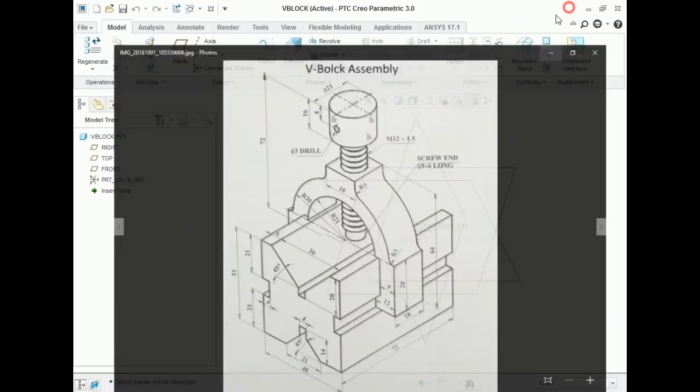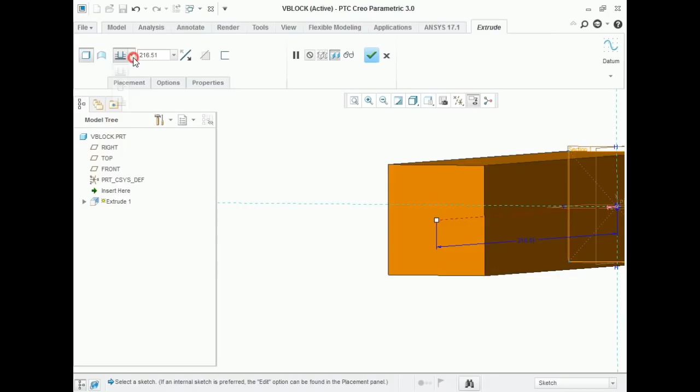Now first draw the rectangle of 51 by 48 and depth is 72. So go to the extrude, select the appropriate plane, go to the sketch view, draw the center rectangle. So this distance is 51 and this is 48. Click on OK and extrude on both sides, and distance is 72.

So it is better to draw one feature at a time. So now create this particular slot. It is having the distance of 21 by 21 from both sides and depth is 4. So go to the extrude, select this particular surface, go to the sketch view, take the reference of this edge and close it. Now draw a corner rectangle

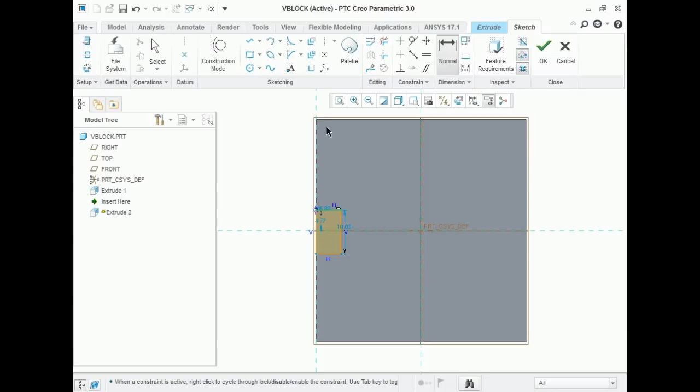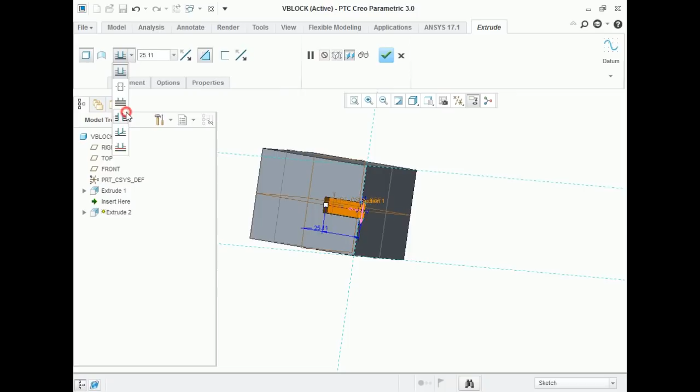to this shape. We know the distance from this end, that is 21. Distance from this end, it is again 21, and the depth is 4. So click on OK, flip it, then remove material through all, then click on OK, and same thing, mirror it on the right side, click on OK. So this shape is created.

Now we want to generate this particular slot having the width of 36. Total this distance is 45. This is 20. So go to the extrude, select the front plane, go to the sketch view, take the reference of this and close it. Now check it, this distance is 6 and then add 45.

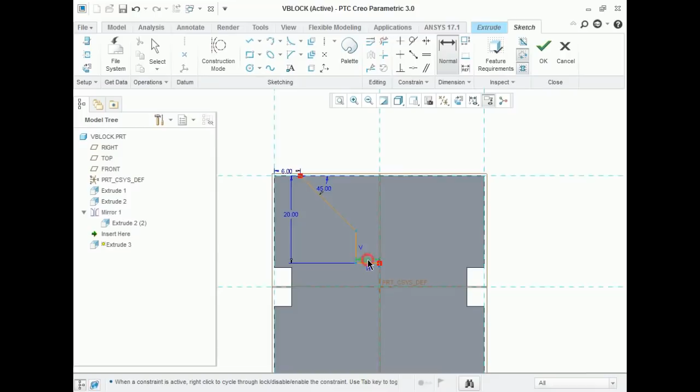So let's draw this line and this shape. We know this particular distance is 45, this distance is 6, and this to this is 20. This is 20. What else we know? We know that this distance is 4, so make it 2. So that is enough.

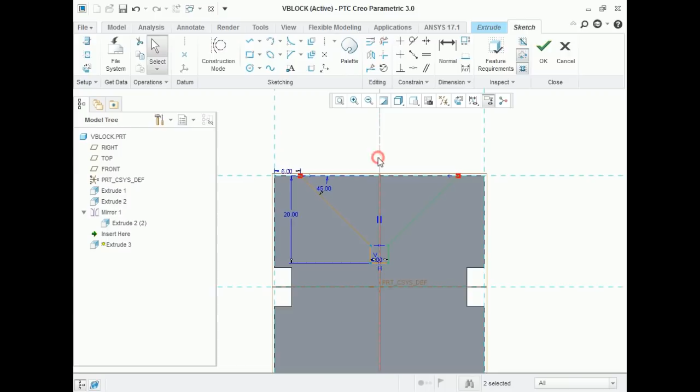Now we want to make the mirror of all those things. So draw first center line and then mirror it. Mirror, select the center line and then close the object, then click on OK, flip the direction, remove material through all, done. And similar type of slot we have to create on bottom side but with different direction.

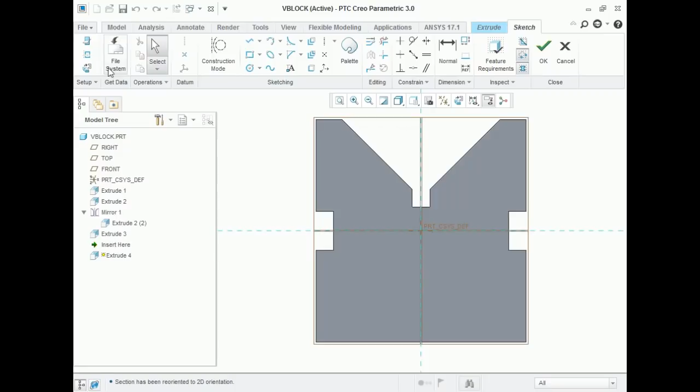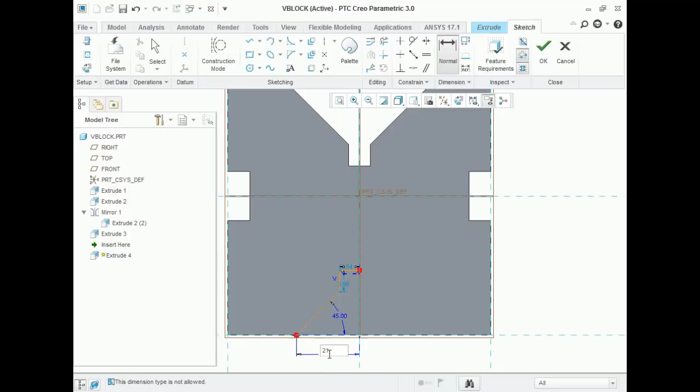So again take whichever reference you want and close it. Then here we again require this distance is 21. So again we will draw such shape. Again we know that this angle is 45. Then we know this distance, this is 21 by 2, then this is to be 2, and again we know this distance is 14. Okay, so this slot is completed.

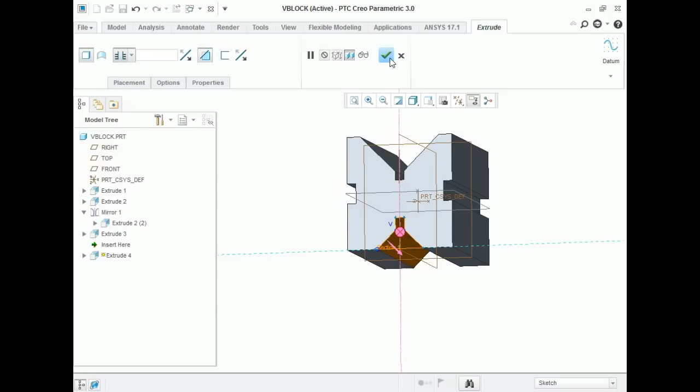So we can again draw a center line, select this particular surface and mirror it with respect to center line and close the shape. So this shape is generated. Click on OK, flip it, remove material has been automatically selected, and through all, then click on OK. So this V-block has been completed. So save it, and next thing we have to draw this C-clamp.

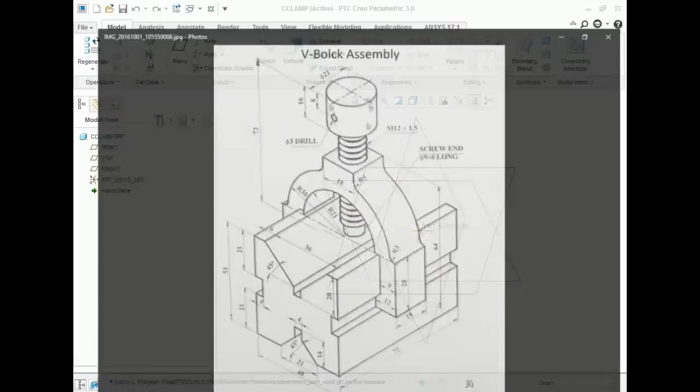So save it and close it, go to new, use default template, uncheck, C-clamp, click on OK, MMNS part solid, OK. Now we have to draw this particular cross section. So go to the extrude, select the appropriate surface, go to the sketch view. Now here we have to draw this circle and this circle. This is R21, R30.

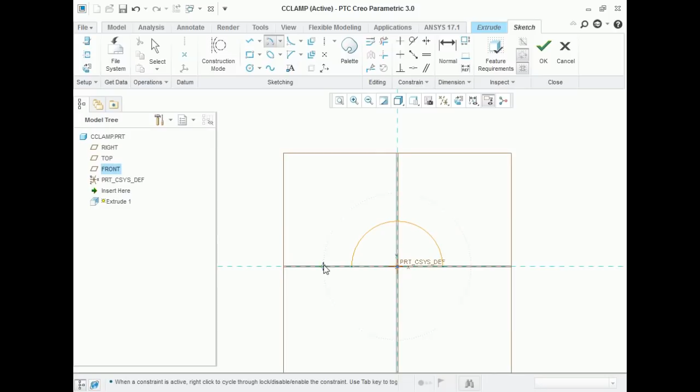So let's draw the center and ends. It is having R21 and R30. Okay, then we have to draw the next thing. So let's draw this particular rectangle. So first draw this shape, whatever is present at the bottom side. So create one horizontal line from here

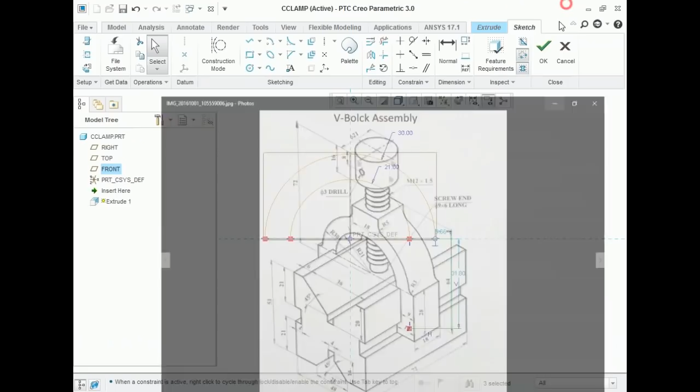and this shape. Okay, and then this distance is 12, but we already know that this is 48 minus 4. So 48 divided by 2, so from center it is 24. So up to this side it is 24, 24 minus 4, that is 20, 20 plus 12, that is 32. So this distance is

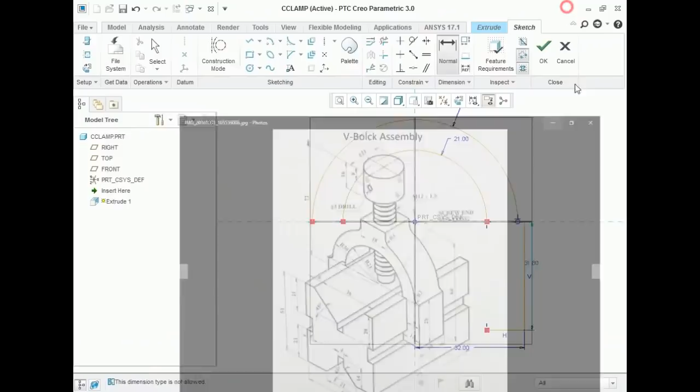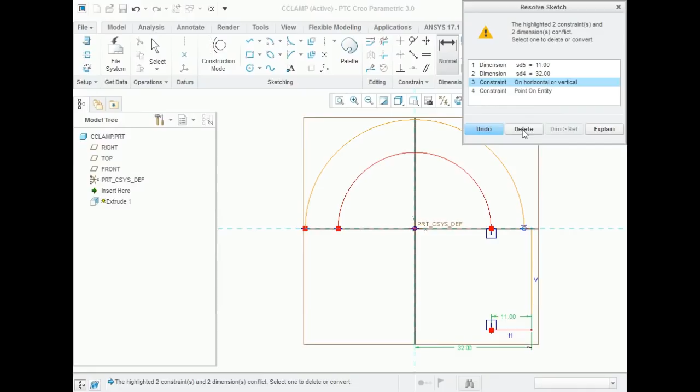go to the normal, this distance is 32, then height is 28, then this is 12. So there are both things, so we don't want this particular thing, so delete it. So this is 12, then height, this thing is 51 minus 21 minus 21.

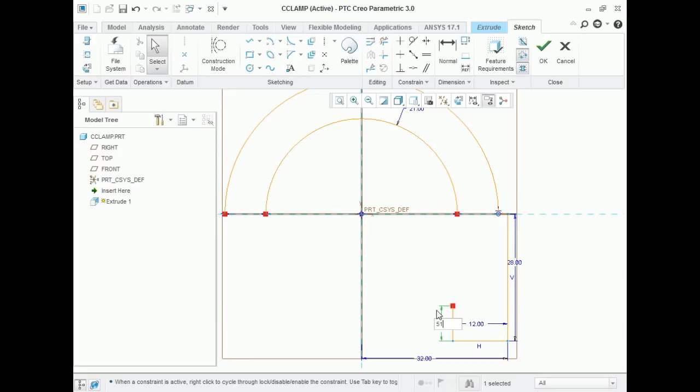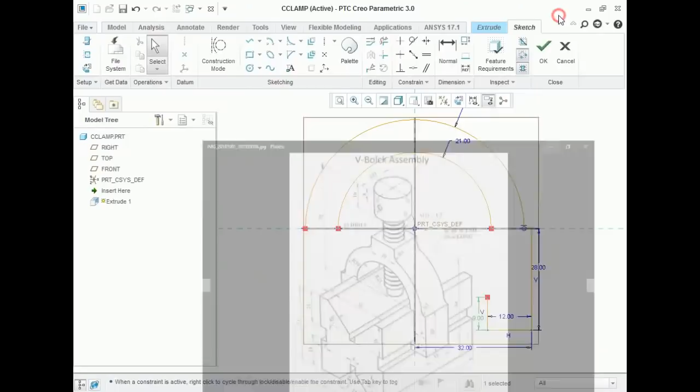So again one small vertical line, and this is 51 minus 21 minus 21, so this comes out to be 9. After that, this particular slot having the depth of 4, or this is 9, this is 12, so it will be 3. So this is 3, and the vertical line from this position. So draw a vertical line and close it.

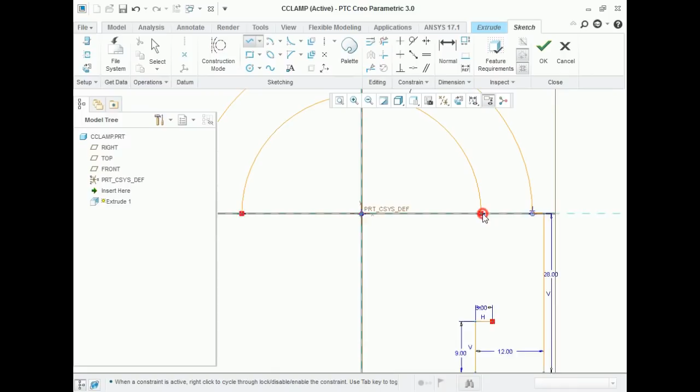Now we want to mirror it on this side, so draw a center line, select the thing which we want to be mirrored by pressing the Control, go to mirror, select center line. So this thing has been mirrored.

So in this particular condition we have calculated it as 24 minus 4, that is 20, 20 plus 12, that is 32. But as we can see, there is some gap present, as this is 9 and 12, so this distance is only 3. So we will add 1 in this particular thing. So go to Creo Parametric, we will make it 33. It is not given anywhere, so keep it 33.

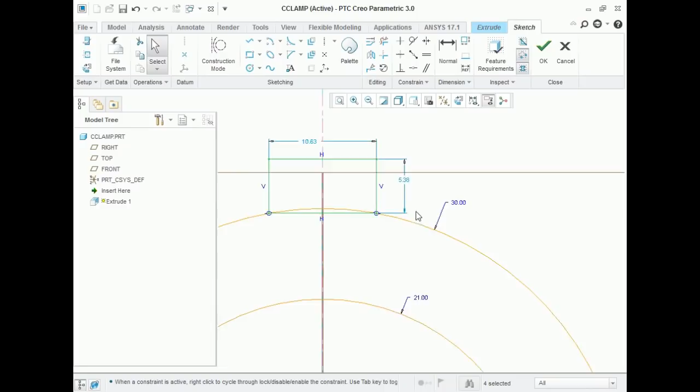Now we have to draw a small rectangle over here, and we know the total distance is 64. So go to the normal, this distance to this distance is 64, and this is 18.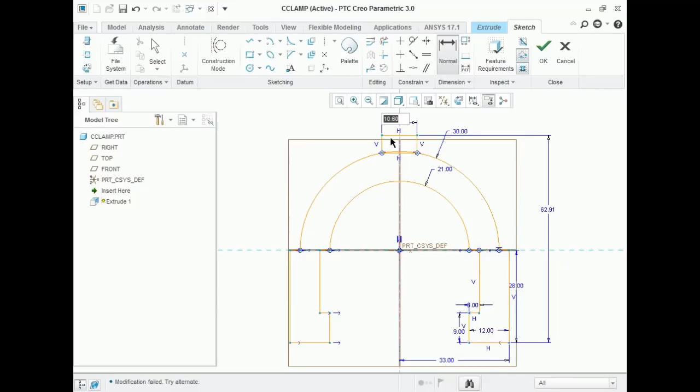Okay, now delete the unwanted line. Okay, so this shape is completed, so click on OK, then extrude on both sides, and the width is 18. So place it as 18, then click on OK.

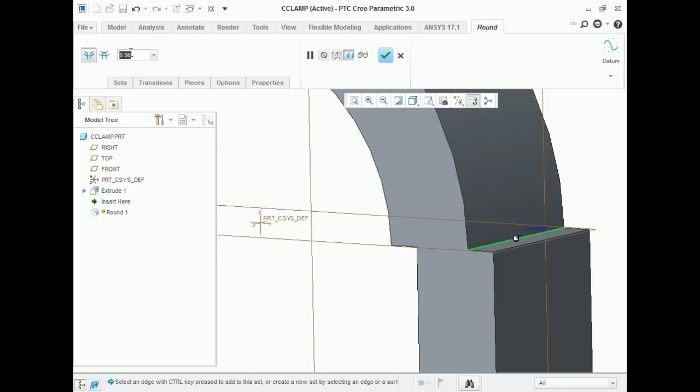So this part is completed, and now we have to make the arc of 3 at this particular position and fillet of 5 at these two positions. So go to round command, select this particular edge, this distance is 3, and same on other side.

So press Ctrl, then go to the set, then click on new set. Now select this particular edge, we want to change the dimension to 5, and same thing from this side. So press Ctrl and select this edge too, then click on done. So this part is completed.

Now we want a hole on the top surface. So the dimension of the hole is given here, that is M12 x 1.5. So go to the hole command, select this particular surface, distance from this plane is 0, and distance from this plane is also 0.

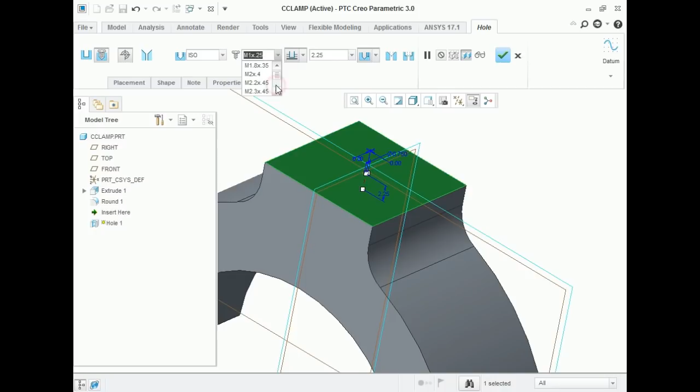So instead of hole you have to make the screw, and in screw ISO standard, here you have to select M12 by 1.5 and hole is throughout, then click on OK. So hole is generated. So this part is completed, save it, OK.

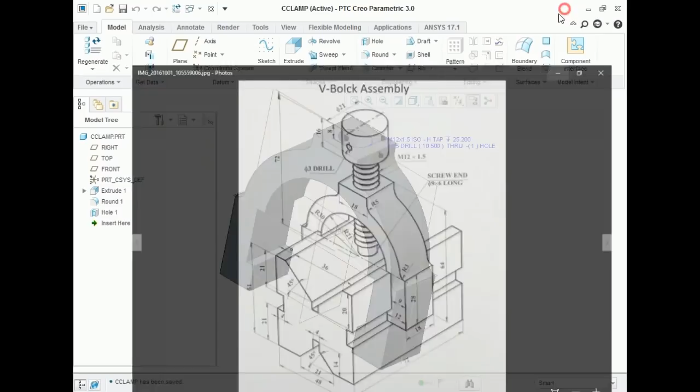Now next thing we have to draw the pin. So save it and close it, click on new, start, screw, click on OK, select mmns part solid, click on OK.

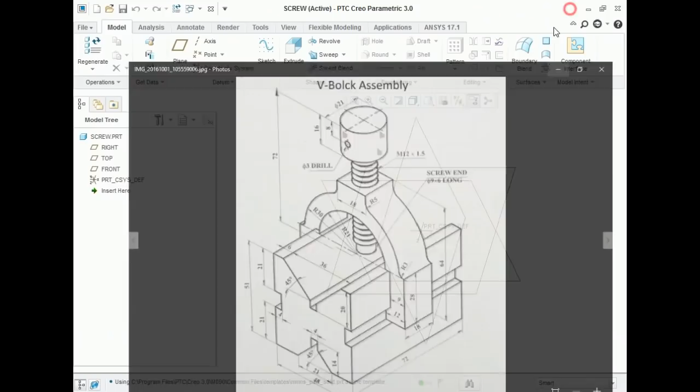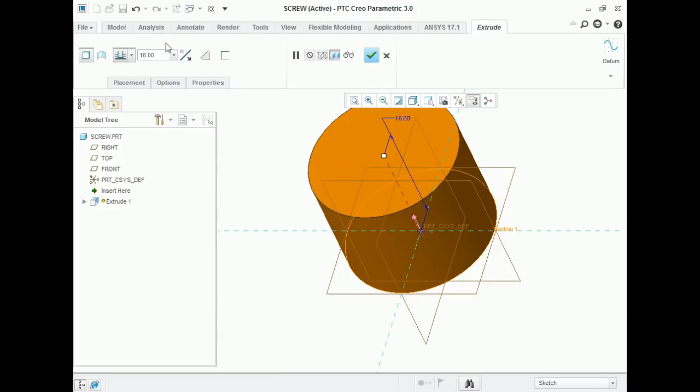Now we have to draw the phi of 21 and depth 16. So go to the extrude, select the phi 21 and extrude it by 16. Click on OK, and this particular is 16 and done. So this shape is completed.

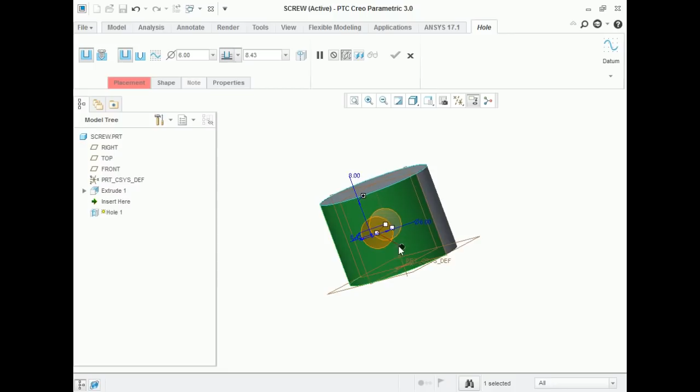Now we have to drill a hole of phi 3 at a height of 8 mm from top surface. So go to the hole command, select this particular surface, we know the distance from this particular surface, so this is 8, and angle from this plane we know that this angle is 0, and we have to make the through hole having the phi 3 and click on OK.

Now next thing, we have to draw this particular screw, and this particular height is 72 minus 16. So go to the extrude, select this particular surface, go to the sketch view, draw the phi. So in this particular condition, here 6 is long, so 72 minus 16 minus 6 and phi is 12.

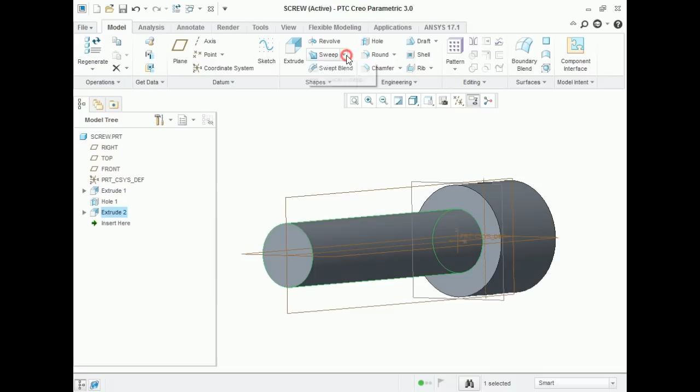So you have to make phi 12, click on OK and extrude it by 72 minus 16 minus 6. So you have to extrude it by 50. Now you have to create the external thread. So go to the engineering and select the cosmetic thread.

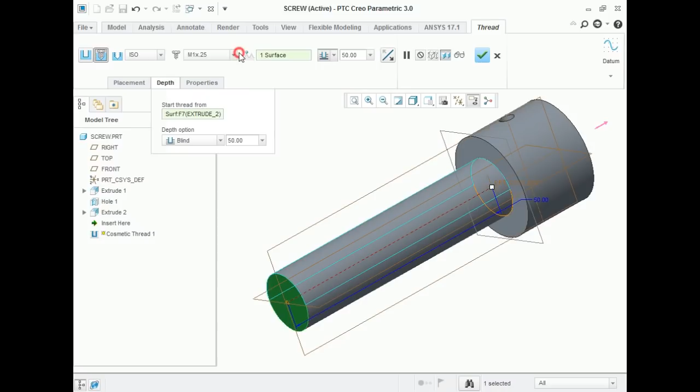So select this surface and it should start from this surface. So press Ctrl and place this surface. So by default it has created the depth of 50. So it is 50. We have to select the standard screw, and here again we have to pick M12 x 1.5. Then click on OK. So cosmetic thread is generated.

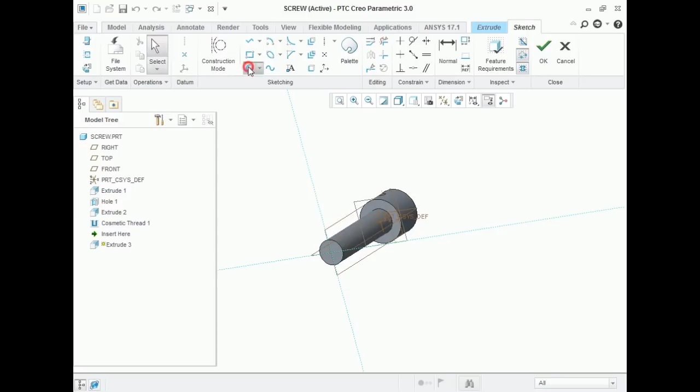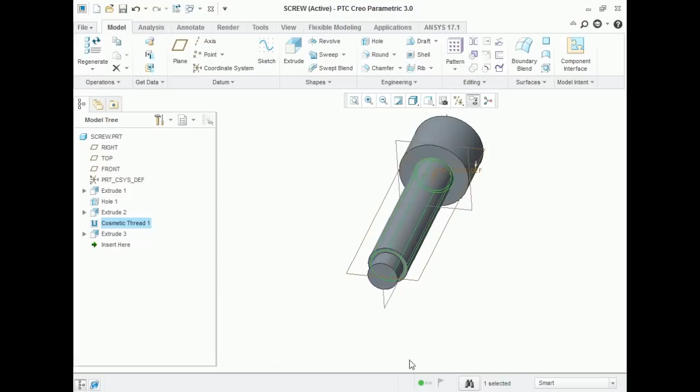Now go to the extrude, select this particular surface, because from this particular surface we don't require any threading. So select this surface with phi of 9, click on OK and extrude it by 6 and done. So pin is generated. So save it, click on OK.

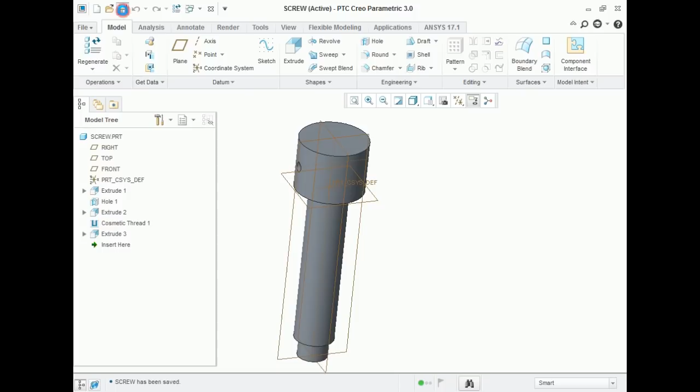So from these shapes now we have to make an assembly. So close it, then go to the new, select assembly, uncheck use default template, again select V block. You can place underscore in between this, click on OK. Select mmns asm design, click on OK.

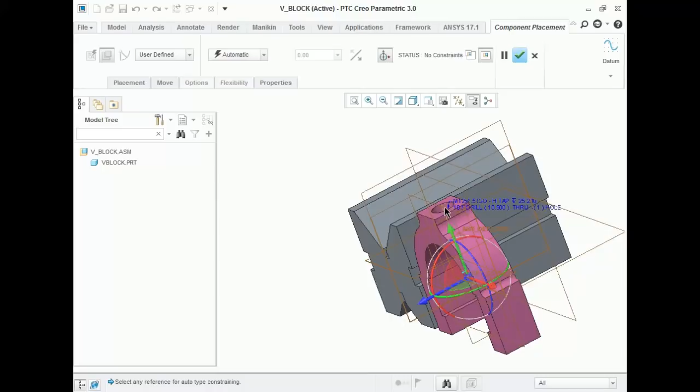Now we have to assemble all three parts. So first assemble the V, call the V block, click on open and set it as default. Then click on OK. So this part is inserted. Again go to the assemble, call C clamp. So we have to assemble this particular plane with this plane.

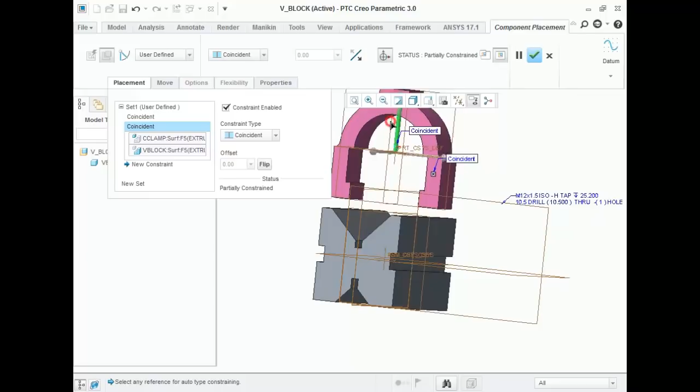Then we have to clamp this plane. Go to the edit definition. So placement, new constraint, this plane should coincide with this plane. So make it coincident, so 1 degree of freedom is still free. So now we have to clamp it by using this surface, which should be coincident with this particular surface. So our clamp is completed, click on done.

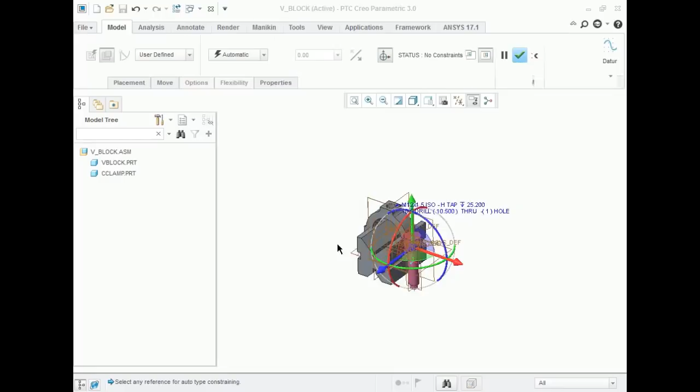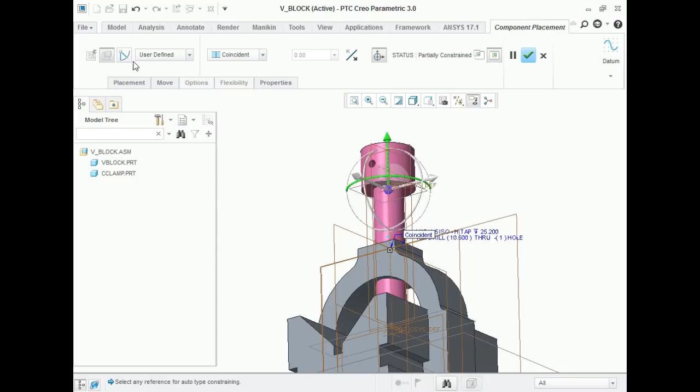Now we have to assemble the screw. So open it, this point should coincide with this. You can translate it and you can set whatever distance you want in between this and this, so which can be transferable. So you can even leave it as it is, or you can add placement and create it as a distance.

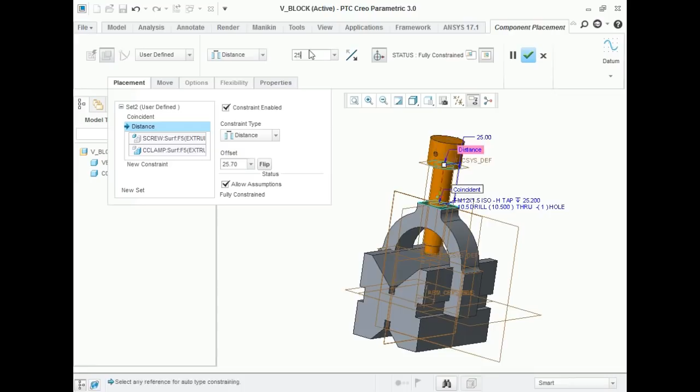So suppose make it as a distance and leave it wherever you want it. So let it be 25 and click on done. So this V block assembly is completed. So you can hide this, and this is your V block assembly. So save it and done.